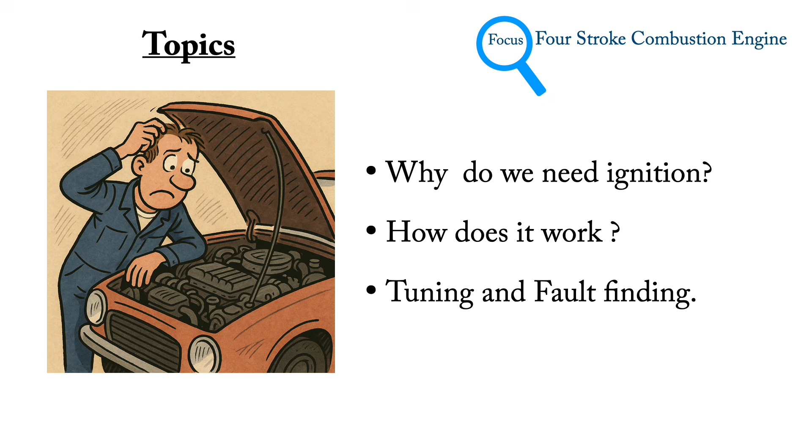Now, before we dig into the actual ignition system itself, we'll do a little refresher on a 4-stroke gasoline combustion engine. As you can see in the picture, we have all the different elements, although I'm quite sure that most of you know exactly what this is, but nevertheless, I will take you through a short introduction on how a 4-stroke engine is working.

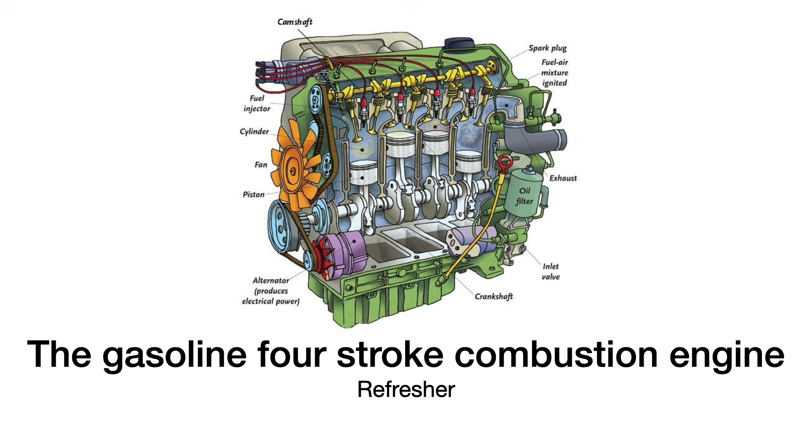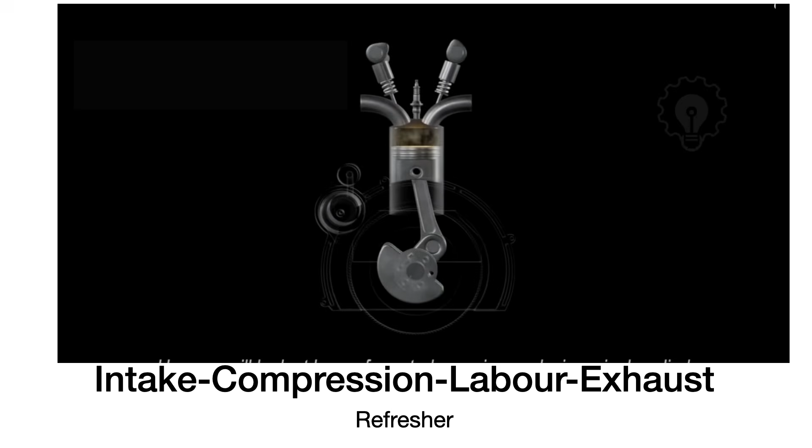We have 4 strokes: intake, compression, labour, and exhaust. And we know that the crankshaft is rotating twice 360 degrees to complete the 4 strokes.

Our first cycle is what we call the intake cycle. And during that cycle, the piston is going downwards inside the cylinder and creates a vacuum. And of course, we'll have to get an air and fuel mixture into the cylinder, and this is happening through the inlet valve, which is opening up.

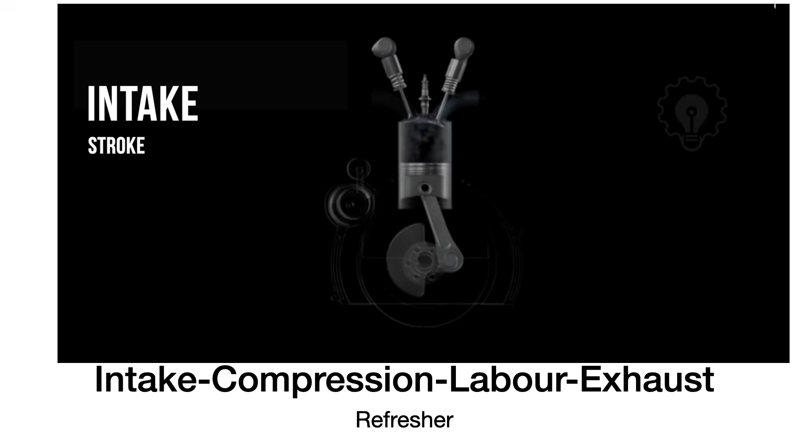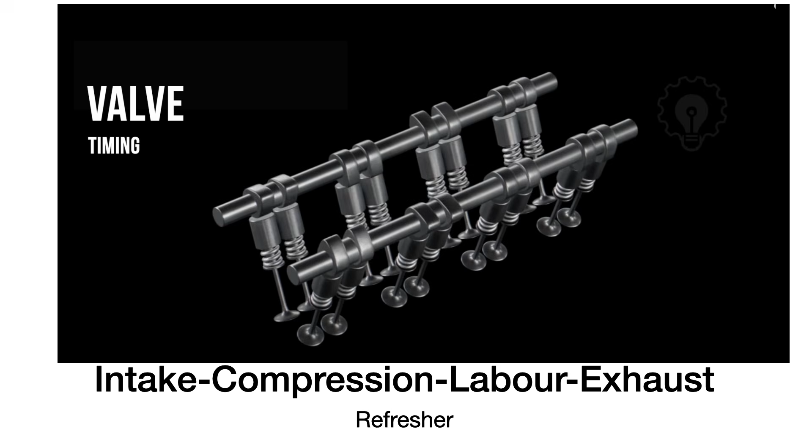The 2 points on the piston are called top dead center and bottom dead center. During that moment of the intake, the inlet valve opens up as soon as the piston goes down and closes as soon as the piston is at its bottom dead center. It is important that the exhaust valve stays closed during the complete intake cycle in order to assure a proper vacuum inside the cylinder. The opening and closing of the valves is controlled by the camshaft, and the camshaft is driven by the crankshaft. Timing is of the utmost importance, and we will discuss this later in the video.

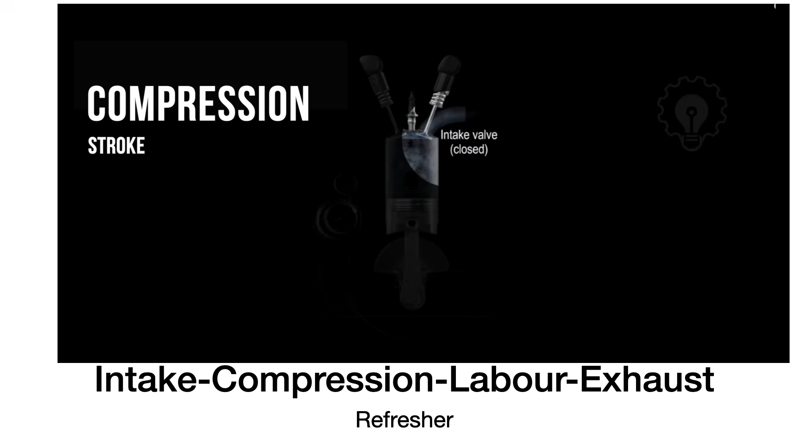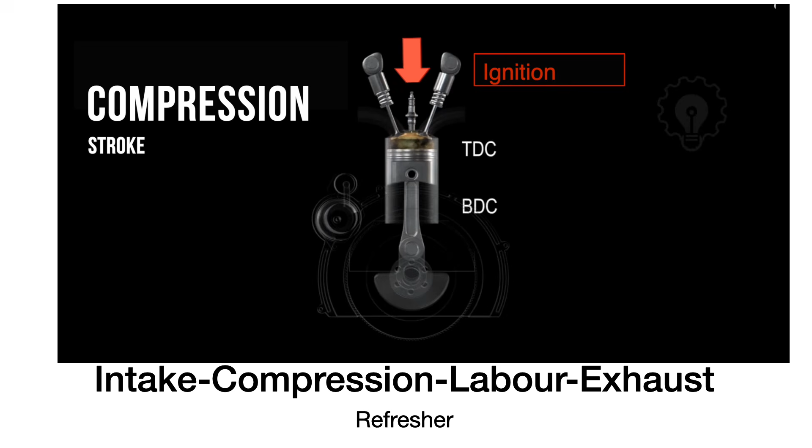When the piston has reached its bottom dead center, the intake valve is either closed or is closing. The piston then travels back upwards, and we call this the compression stroke, compressing the air and fuel mixture. Once the piston is near its top dead center, we're getting ignition. The spark plug ignites the mixture, and that marks the beginning of an explosion and starts the labor stroke.

As with any explosion, the combustion causes a tremendous force onto the piston and forces the piston downwards, hereby rotating the crankshaft. The force is expressed in horsepower and converted on the crankshaft to what we call torque. During this moment in time, both intake and exhaust valves must be closed.

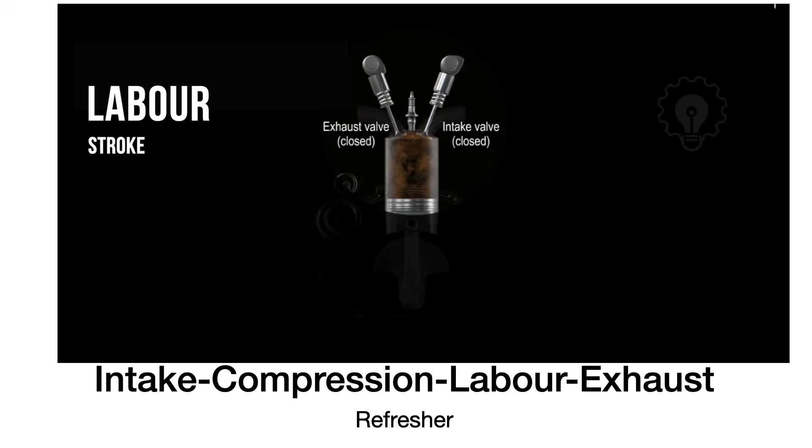Now that the labor stroke is complete, we must vacate the cylinder from the exhaust gases, and thereby the piston moves upwards, the exhaust valve opens up, and the gases are extracted through the exhaust manifold.

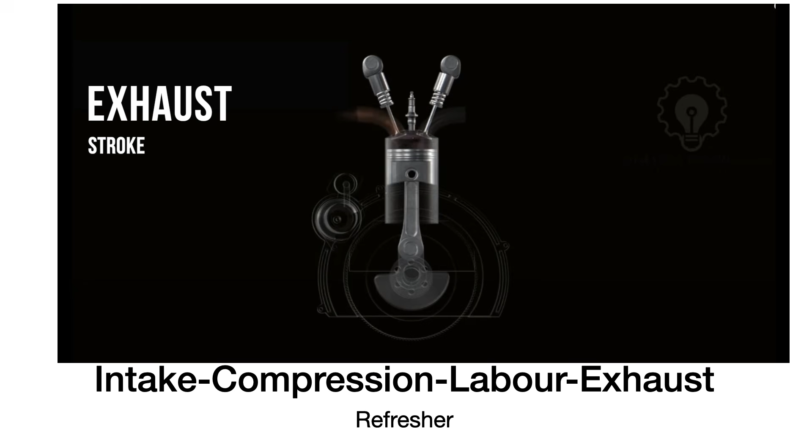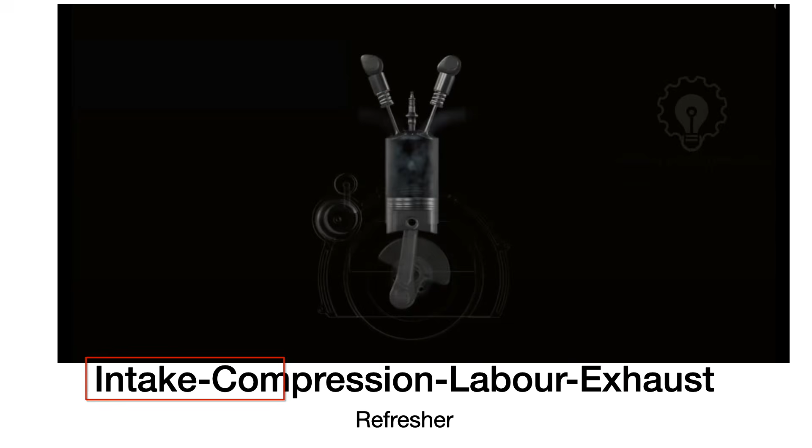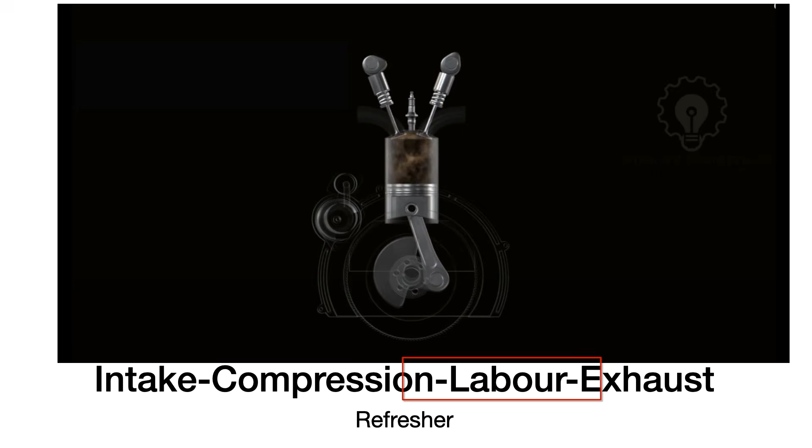And the cycle repeats. We have again an intake cycle, piston is going down, then the piston is going back up, we get our compression cycle, both valves are closed, we get ignition. Once we have ignition, the piston is forced violently down, we call this the labor stroke. And then when the piston has reached its bottom dead center, it's going to move back upwards and extracts the fumes from the cylinder through the exhaust valve, and the cycle completes.

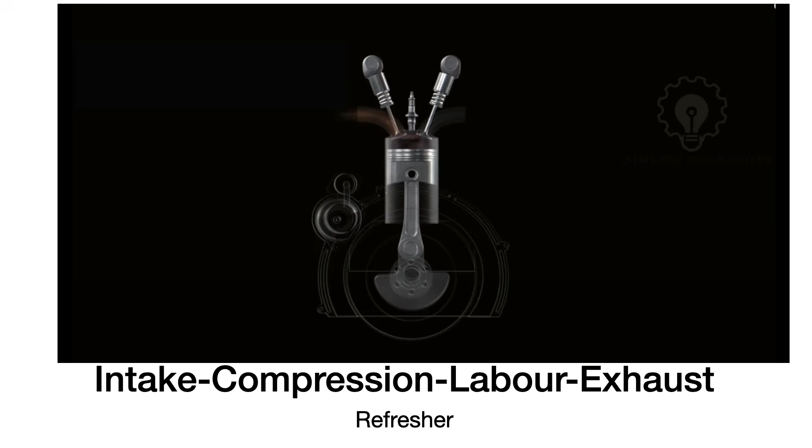Now that we know how the four-stroke engine is working, we need to determine at what moment in time we need to ignite the air-fuel mixture. We know already that it's at the end of the compression stroke, but at exactly how many degrees before top dead center does this have to happen? That is subject to many different parameters, so let's have a look at that.

The right moment of ignition depends on many different factors. For instance, the type of fuel. Not all fuels burn the same way - think about diesel fuel versus alcohol, what burns faster? Then there's RPM. The faster the engine is running, maybe the more advance we have to give it, because the piston is traveling a further distance in degrees within the same given time as it would at a lower RPM rate.

What about the compression ratio? High compression ratios, lower compression ratios - very important, because the air, gas, and molecules will be closer to each other or further away, so the flame propagation will be different.

Now what about the air-fuel mixture, the AFR? Sometimes we run lean, sometimes we run rich. Again, we need to consider this for the ignition moment.

And then we have the temperature of the engine, which also has a huge influence on the moment of ignition. I'm quite sure that some of you into racing have experienced self-combustion at one moment in time that blew up your engine, most likely because of a very high temperature inside the cylinder that was igniting the fuel mixture at the wrong time. There are some other parameters of importance as well, but we'll look at the most important ones.

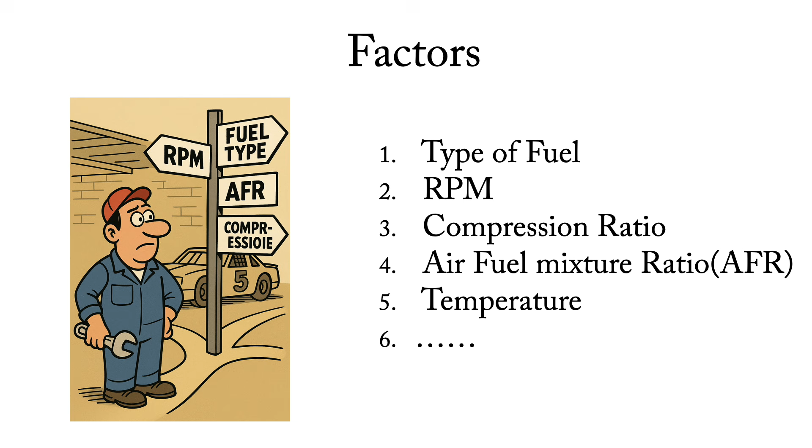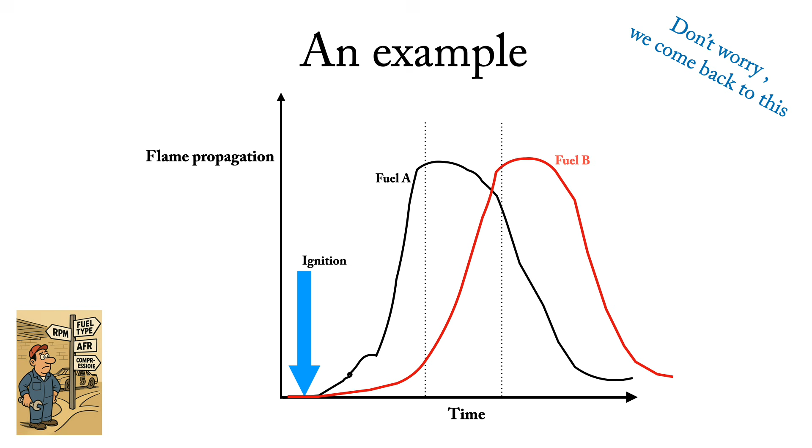Factors that can influence your ignition will be discussed further down in the video. But right now, we need to see how we are going to create the spark. And once we've created the spark at the right moment in time, we will have to distribute it. We may not have a single cylinder car - we may have a 4-cylinder, a 2-cylinder, an 8 or a 6 or a 3-cylinder. So it's important that we are able to distribute the spark to the proper spark plug and the proper cylinder.

Here we have a very simple diagram of an induction system. We have what we call a coil, and you can see on the right hand side different types of coils. They come in all forms, and the coil itself is nothing more than a transformer - it has a primary winding and a secondary winding.

When the contact is closed, we have low voltage and high current flowing from the positive of the battery through the primary winding back to the ground. That builds up a magnetic field inside the induction coil. The moment we break the low voltage high current path, there is going to be an induction on the secondary winding.

The secondary winding typically consists of a lot of windings on thinner wire, while the primary winding has a thicker wire and fewer windings. The result is that we get an induction to the secondary winding, which causes a high voltage between 10 and 20 kilovolts, but low current, and that we can use to ignite the spark on the spark plug.

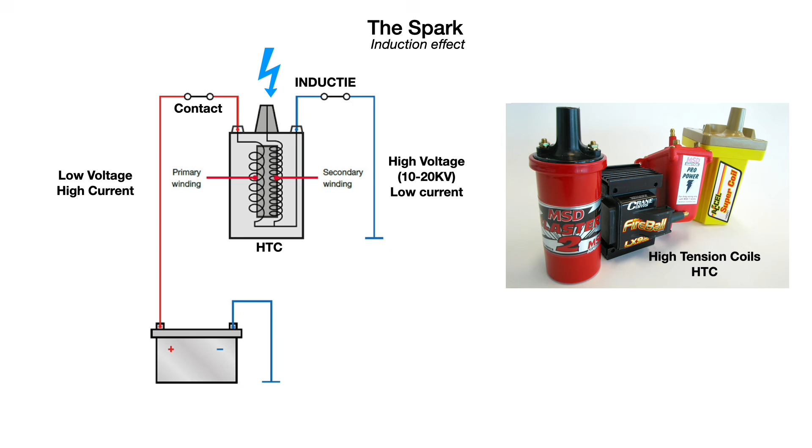Now we know that we must be able to interrupt the current through the primary winding of the high tension coil in order to create the spark, and therefore we will need some type of a switch. Now I call this the contact point. If you worked on cars before, especially older cars, we call this the breaker points, and I'm quite sure you have been adjusting the gap on those. So whenever the breaker points or the contact point opens up, the current stops through the primary winding, we get induction in the secondary winding, and we develop a high voltage on the secondary winding.

That high voltage is then passed along to the distributor, and inside the distributor cap we have a rotor which is pointing to the right lead, and then the lead connects to the spark plug, and then we have the spark on the spark plug itself.

It's important to note that the high tension coil comes in two flavors. We have what we call a low impedance high tension coil and a high impedance high tension coil. You can see the resistance values for primary and secondary windings in the little table that we have there.

What is important here is that if you are going to order a low impedance high tension coil, you must use a shunt resistor, otherwise you may burn out the primary winding. The shunt resistor will reduce the amount of current that will flow through the primary winding. On the other hand, if you're going to use a high impedance coil, then there is no need for a shunt resistor at all, so keep that in mind. Typically, the low impedance HTCs were used on older cars, but modern cars tend to have a high impedance HT.

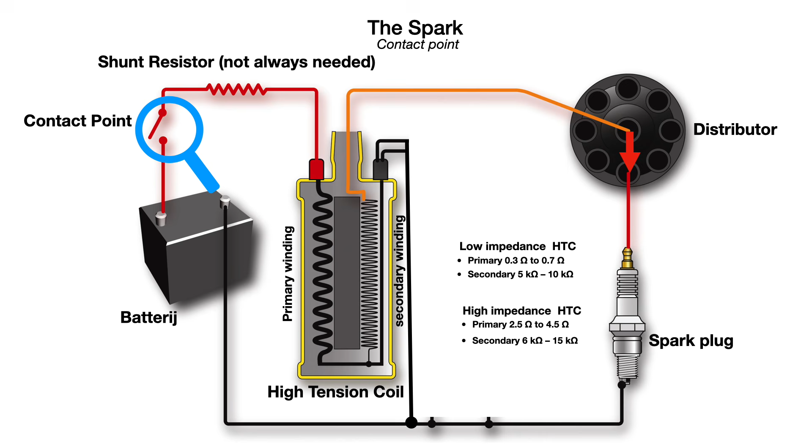We have here a few examples of contact points, but there are more types. On the bottom we have our well-known mechanical type, the breaker points. Then we have the inductive Hall version, which is no longer mechanical but is based on induction. And then on the right hand side we have something special, the twin, with two breaker points. Now there are other types like optocouplers and so on.

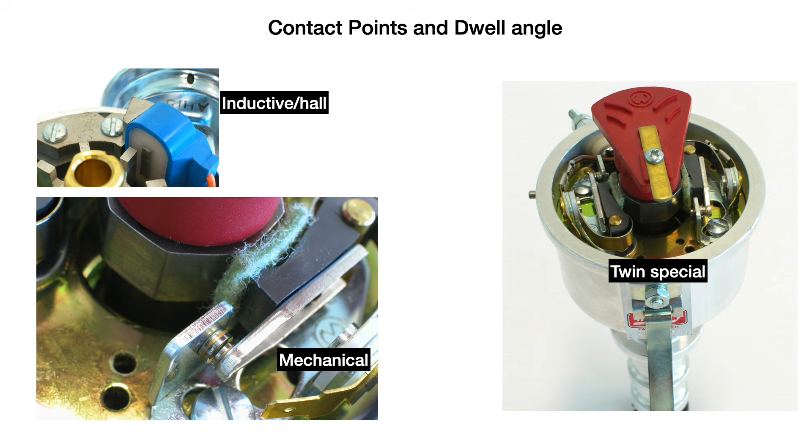On the left hand side we've got a picture of a traditional distributor, and the two points of interest for us right now are the notch and the contact breaker points. The notch is driven typically by the camshaft. If you have a 4-cylinder distributor, then you will see 4 notches on that shaft. If it's a 6-cylinder, you have 6 notches and so on.

We already know that if the contact breaker points are closed, we get current through the HTC primary winding. While the notch shaft is rotating, the contact breaker points will open up. If they open up, we get induction, we get high voltage, and we get a spark. While the notch continues to rotate, we will see that the breaker points will close, and at that moment in time we are having current flowing through the primary winding of the HTC. So it is really the notch that opens and closes the contact point.

That is why it's so important that we adjust the breaker points with the right gap, because that is going to define the dwell angle. Now the dwell angle is a fancy word, but it's nothing more than the amount of degrees under which the contact point is closed. This is very critical because we need to allow sufficient current and time to flow through the primary winding of the HTC to build up a strong magnetic field.

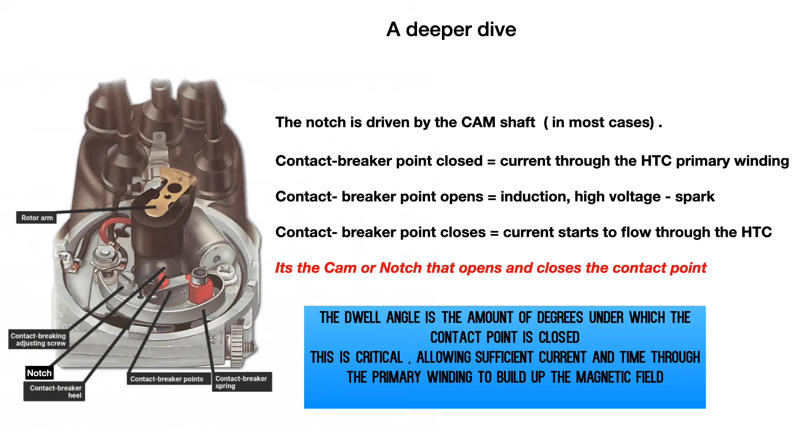So the traditional mechanical breaker points have been replaced by electronic solutions, and we'll be looking at two types: the capacitor discharge ignition system and the electronic ignition system. But regardless of which one we have, we do require a pickup point, a replacement for our well-known breaker points.

Typically, the pickup point is either a Hall effect or a magnetic pickup, but it could also be an optocoupler. That device will then generate a pulse each time it is triggered, and then the pulse is fed to either the CDI or the electronic ignition system. If you are using an electronic ignition system, then that pulse will be amplified by solid-state devices inside the ignition system to drive a high current through the primary winding of the HTC.

A CDI is working slightly different. It's going to load up a large capacitor inside the CDI, and this capacitor will discharge across the HTC as soon as it receives the pickup pulse from the pickup device. Now be very careful, as the CDI is using a high current and hundreds of volts on its primary winding to the HTC.

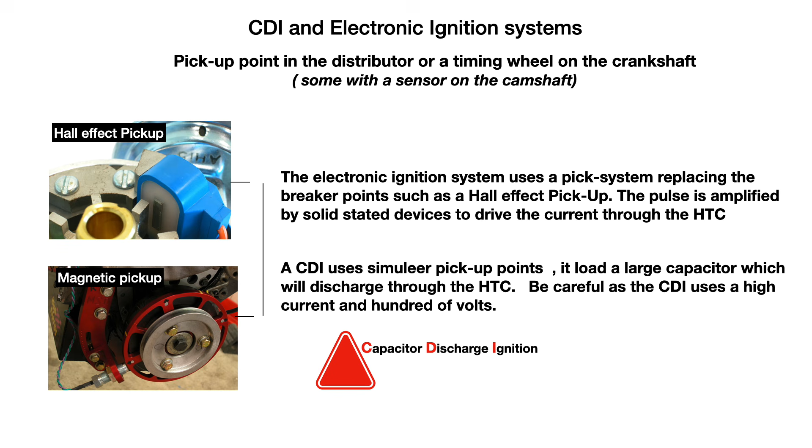So we've been able to generate a high tension, and that could result in a spark, but somehow we need to get this high tension to the proper spark plug. Our engine might be a 4-cylinder, a 6-cylinder, an 8-cylinder, and it might have a certain firing order, maybe cylinder 1 first, then cylinder number 3, then cylinder number 2, and then 4. Firing orders could be different depending on the engine.

So somehow we need to have what we call a distribution system, and that is why we have what we call a distributor. The distributor is typically driven by the camshaft, and it has inside pickup points, be it mechanical or electronic. On top of it, you will find the distributor cap, and on the distributor cap you always have a central point. On that central point we connect the lead coming from the high tension coil, which will then distribute the high voltage to one of the other connectors on the distributor cap. Each connector there, all around in a circle, will actually lead up to a specific cylinder.

Inside the distributor cap you will find a rotor, and on the central point on the rotor we will actually have the high voltage coming in, typically through a carbon little spring-pushed part. That often goes wrong, so we might talk about this later when we start talking about troubleshooting. Then the rotor will distribute over the brass pathway to the proper lead, or the proper connection point on the distributor cap.

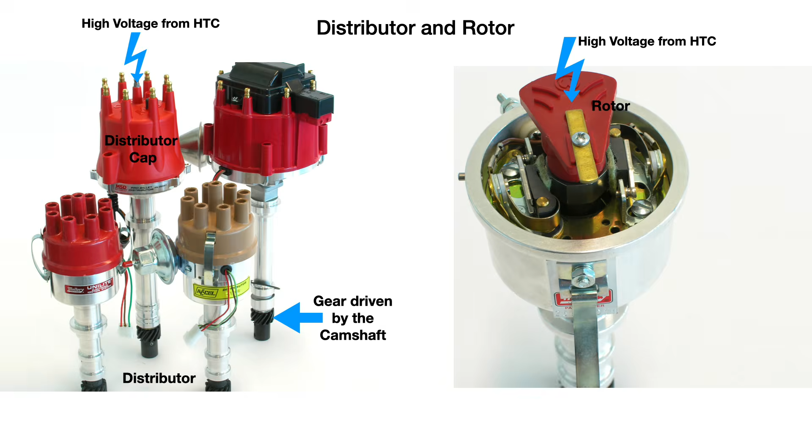Cold types have typically a large insulator jacket surrounding the electrode, so they convey the heat to the engine block much better. That means the spark plug itself is not going to get real hot. That is good, but the problem is that we're going to have an issue on idle, because it's going to spoil the electrode - we will have carbon buildup and so on, and we won't be able to burn it off because the spark plug isn't getting hot enough.

On the other hand, the cold type is good especially if you go to high RPMs and develop a lot of heat in the car. Then they are really good, because if you were to use a warm type, you probably may melt down the electrode. The warm types are just the opposite - they have a smaller insulation jacket, so the electrodes get a lot hotter inside the engine when it's running.

So the warm types convey less heat to the engine block, which is really good for running idle, because then they will burn off all the deposits on the electrode. But on the other hand, if we're going to go to high demands and high RPMs, then they won't be able to sustain that, because they will actually get so hot that they are going to melt down the electrode. So we really need to make sure that we select the right spark plugs with the correct heat range, because that is all very critical.

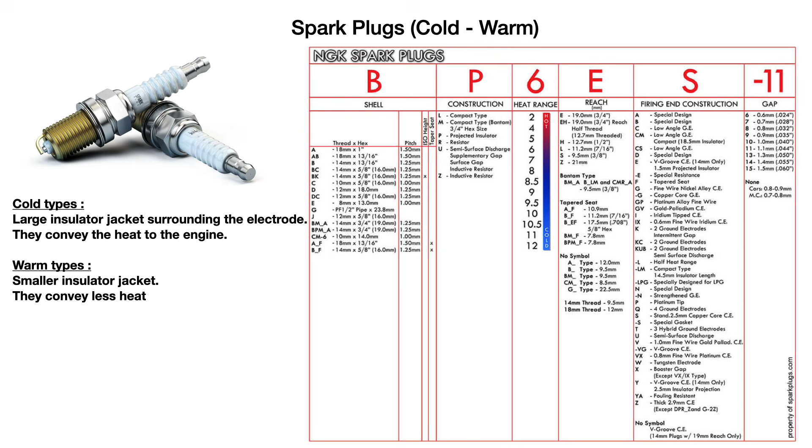Which one should we now select? So now the question is, what should we use for our car? Cold or warm spark plugs? Well, the answer depends on many different factors: the engine power, the compression, the fuel type, and how you're going to use the car - be it a street car, a race car, or a fast road car. It all depends.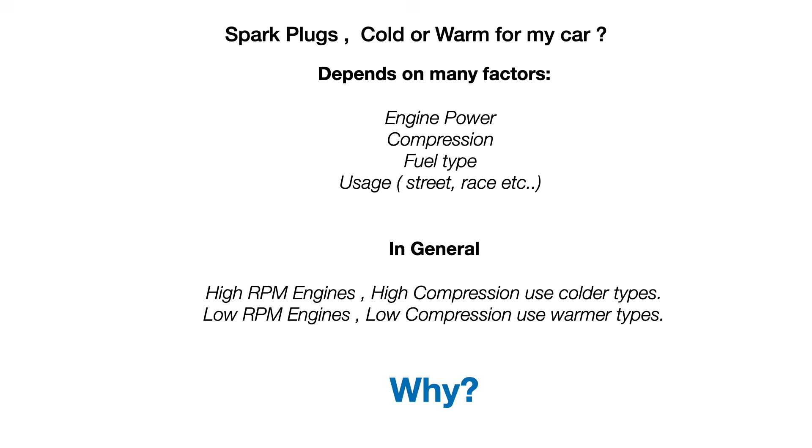But in general, we can say that engines running at high RPM with high compression are better off with colder spark plugs, and engines running at lower RPMs and low compression are better off with warmer types. And now the question is, why?

So maybe you can now formulate the answer. I assume you already got it right, but let's recap anyway. On performance engines - those with high RPM and high compression - they are much better off using a colder spark plug. That's simple, because those engines create high temperatures inside the combustion chambers.

And that can cause a too-hot spark plug to glow and trigger pre-ignition on the fuel-air mixture, which is devastating for an engine. If you're running at high RPMs and this happens, you get an unwanted ignition, and that could be at the right time or the wrong time. If it's at the wrong time, it's going to blow up your engine. We often call this pinging, and that's the same as murder of the engine, or damage to the engine.

A too cold spark plug, however, will foul at low RPM because the deposits on the electrode will not burn off. Now, standard engines are engines with normal RPM and relatively low compression. They are better off using a hotter spark plug since the temperatures are lower inside the combustion chamber. If you were to use a cold spark plug, it will actually foul. The hot spark plug will burn off that fouled electrode, but not if you're using a cold spark plug.

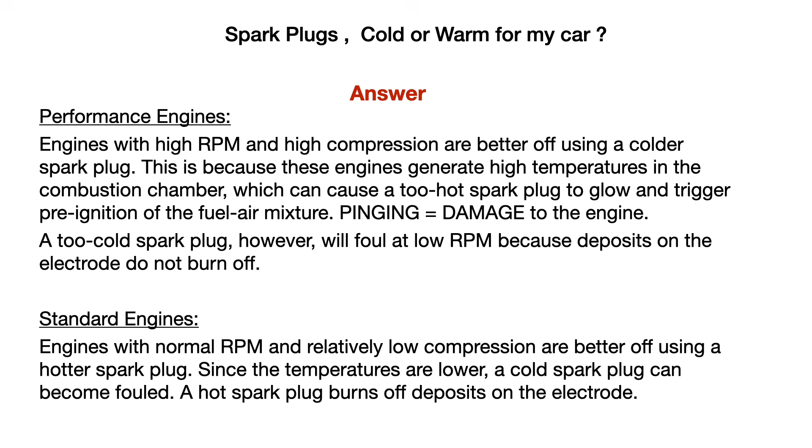So folks, so far so good, and I hope you are still following and didn't fall asleep yet. I know it can be pretty boring sometimes, but now we need to talk about the ignition moment - what is the right time to deliver that spark to the spark plug?

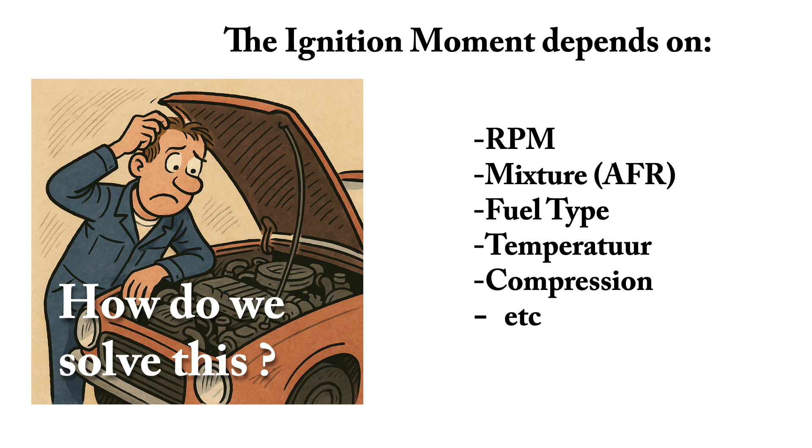And that depends on many different factors: the RPM, the mixture, the fuel type, the temperature, the compression, and a couple of other factors. And we need to fix all this. So how are we going to solve this so that our ignition system is adapting to all these different parameters?

So somehow we need to make sure the engine is running properly on idle, low RPMs, and high RPMs. We will do this by adjusting the moment of ignition, and we often call this the advance. Now let's assume the engine is running on idle and we have set our ignition advance to, let's say, 4 or 5 degrees.

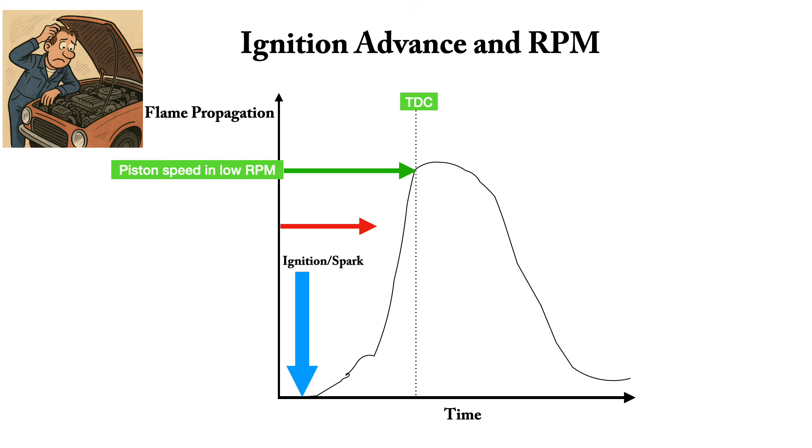So the piston is moving at a slow speed inside the cylinder, and we have the ignition moment just at top dead center - in fact 4 degrees before top dead center - which matches up with the peak of the burning curve, or the flame propagation.

Now let's assume we are going up in higher RPM, so the piston is now moving a lot faster inside the cylinder, so it's going to reach top dead center a lot earlier. And as a result, the peak, which still has its own burning time, will come much later after top dead center.

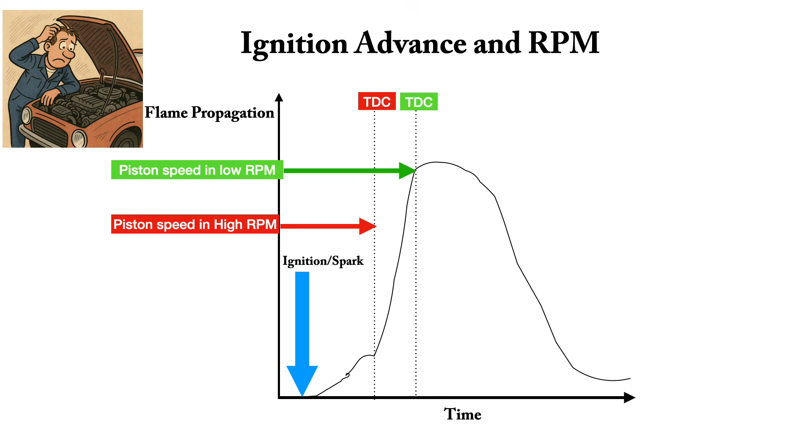So now we have lost a lot of power. It's important for us that we can adjust the ignition advance so that it works under all RPM conditions. The solution is rather simple.

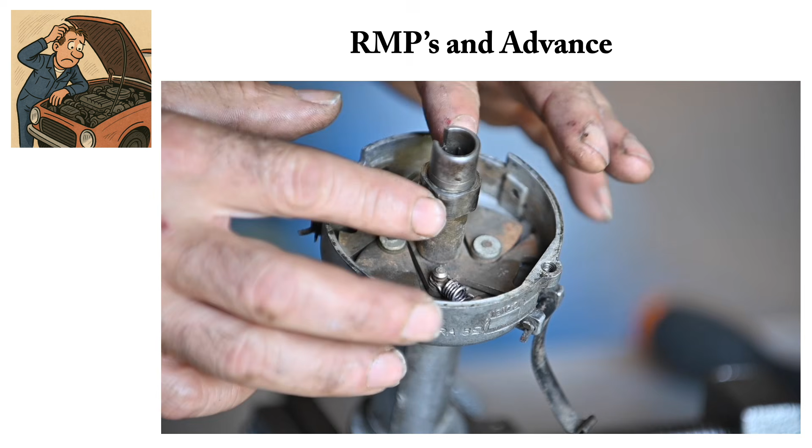Inside the distributor we have what we call bob weights, and those bob weights will fly out under centrifugal force while the shaft is spinning. There are also some springs that will retract them back or limit the advance. If the bob weights move out, we are having more advance.

Bob weights are mounted on the shaft of the distributor, and while the distributor shaft is rotating, the bob weights will be thrown outwards by centrifugal force. They are constrained by the springs, and as such they will move forward the advance. In other words, they rotate the platform where the pickup point is, and we get more advance.

If the RPMs are coming down, then the bob weights are retracting again and the platform rotates in the other direction and we have less advance.

If you are into tuning your car and you want to influence the ignition curve, then you can work on the springs. You can install softer springs so you will have far more advance, or harder springs so you have less advance. And of course you could also play with the weight of the bob weights.

Now on modern cars you can do this with a program, and quite often the distributor will allow you to program it through a USB or Bluetooth interface where you can set your own ignition curve. Let's look at one of those curves, a typical curve you would find on a 1-2-3 ignition system where you can program the curve. That's not based on bob weights and springs, it's fully electronic. So there are different flavors of adjustment.

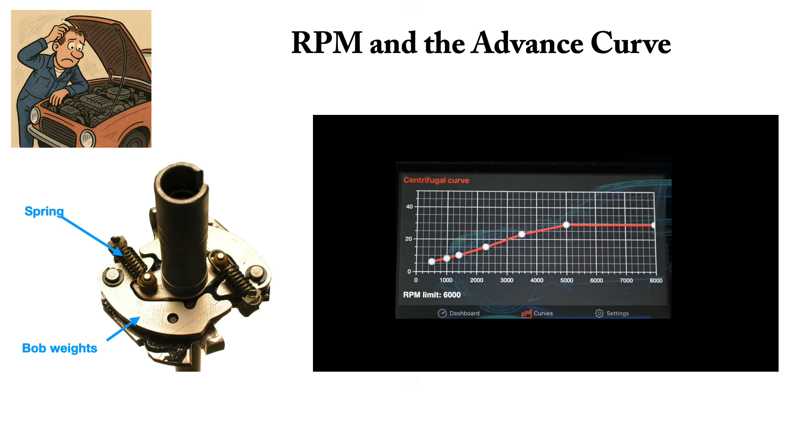Now let's take it a step further. We need to look at our AFR, air-fuel ratio, and the advance, because lean mixtures are burning slower and rich normal mixtures are burning faster.

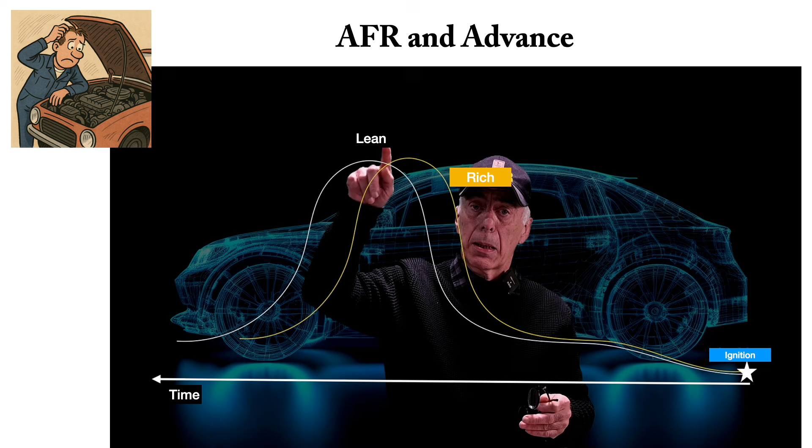I know this is a fairly busy slide, but we'll take it piece by piece. Assuming now that we are going downhill or cruising along, then our throttle on our carburetor will be either fully closed or partially closed. At that moment in time, we are having a very lean mixture inside the cylinders, and we know that the lean mixture is burning slower.

So the peak is coming later, but we still want to develop enough power to keep the car moving, especially under cruising conditions. So we need to advance the ignition moment even more, further than what the bob weights are doing, and therefore we are using what we call the vacuum advance.

The vacuum advance is the vacuum out of the intake manifold, which is fed to the side of the distributor, and there we have a little membrane that will pull the bob weights even further, or that platform even further, so we get more advance.

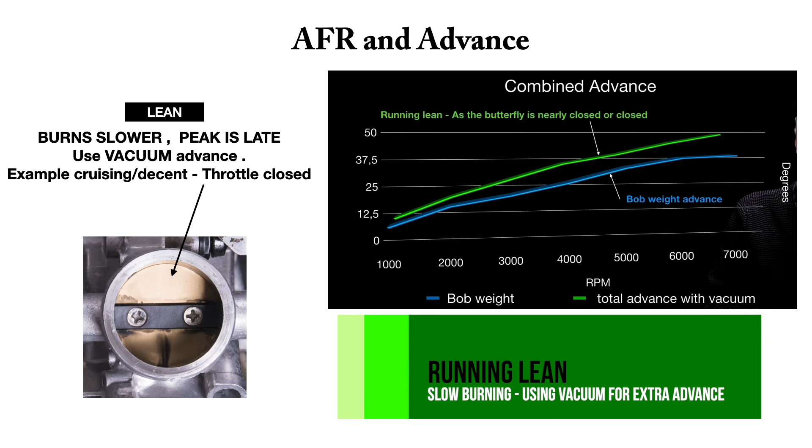Of course, if the throttle is open, that advance isn't working anymore because the vacuum falls away and we fully rely on the bob weights.

So under normal driving conditions with a normal rich mixture, for instance under acceleration, or we are going wide open on the throttle, or giving enough throttle, then the throttle is open or partially open to a large extent, and at that moment in time, the vacuum disappears completely and we fully rely on the bob weight advance.

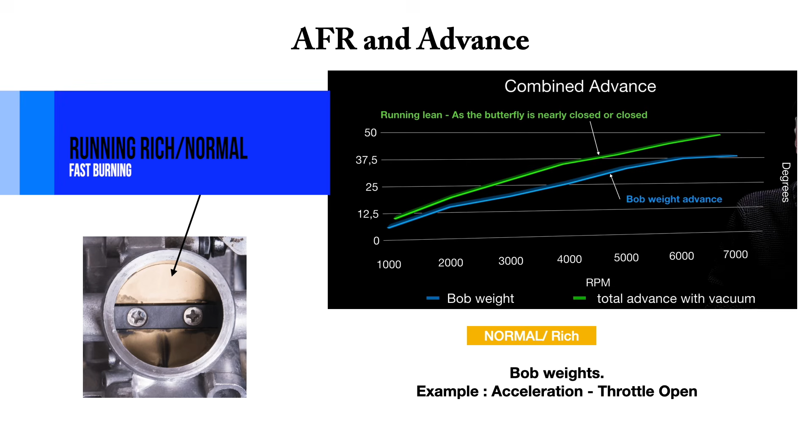That is why in racing, we never have a vacuum hose or a vacuum advance, because we are most of the time wide open. We are always running normal and rich. We never end up in the lean condition.

Anyhow, if you look at the diagram or the curve on the screen, it's the combined advance. As I explained, the blue curve is how the advance system is working only with the bob weights. Whenever the throttle on the carburetor is open, we fully rely on the centrifugal force of the bob weights creating the advance.

However, if we end up in a lean condition, for instance we let the throttle go and the butterfly closes in the carburetor, then we want to continue to have some power, like under cruising, and we need to make sure we get more advance because that leaner mixture is now burning slower. That's the moment the vacuum advance will kick in, because we have created a lot of vacuum inside the intake manifold, which will rotate the advance inside the distributor, and that is the green line, which is the combination of the bob weights and the vacuum advance.

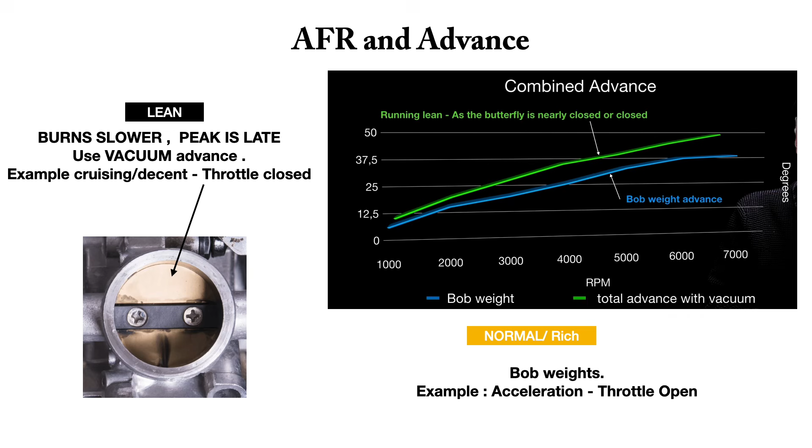Remember, even though we have vacuum advance, the engine is still running at a certain RPM, so the bob weights are still doing their thing.

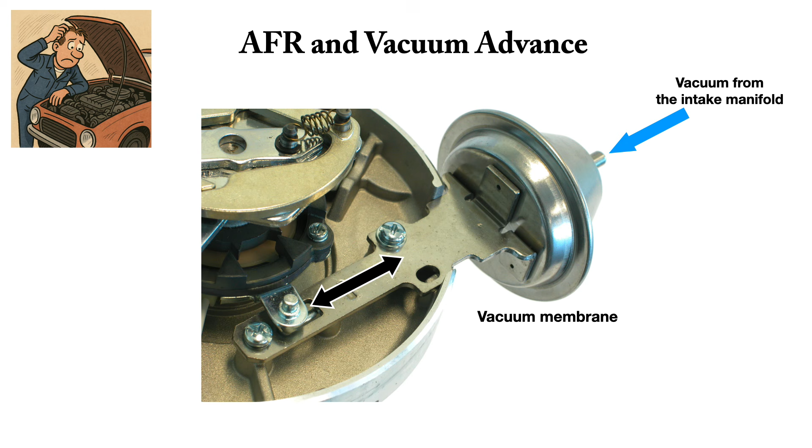This is a very easy slide compared to the previous one, and we are looking down onto the vacuum advance mechanism. You will see the distributor, and on the distributor we have a vacuum advance membrane, and the blue arrow is connecting the vacuum membrane towards the intake manifold with a small tube, and that's where we apply the vacuum. When the vacuum is applied, you can see with the black arrow that we are moving forward or backward the complete platform inside the distributor to create that additional vacuum advance.

In this little video I have hooked up a vacuum meter, and I can see the vacuum being created in the intake manifold depending on the throttle position.

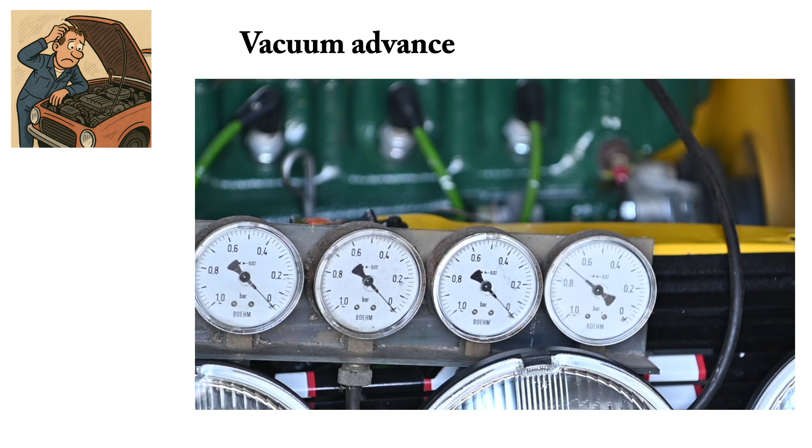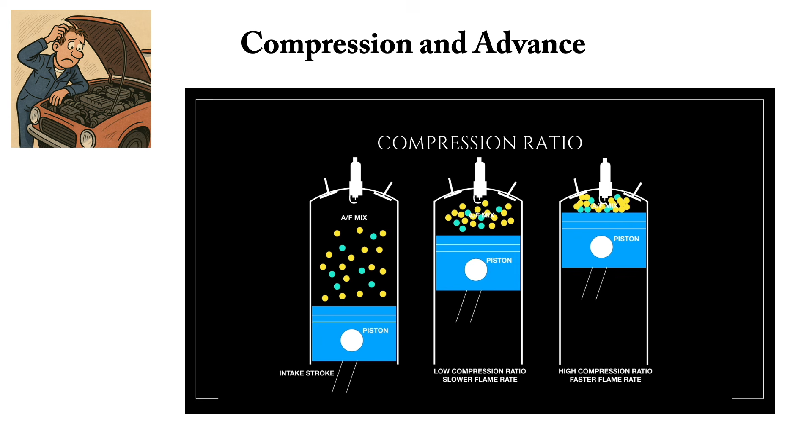So now we need to talk about something very important, the effect of the compression on the burning speed. If we're looking at a low compression engine, or an engine with a very low compression ratio, then the burning chamber is fairly large. That means that during the compression stroke, the air and gasoline molecules are far away from each other, and it makes it very hard for the flame to propagate through that kind of mixture. So it's going to burn a lot slower.

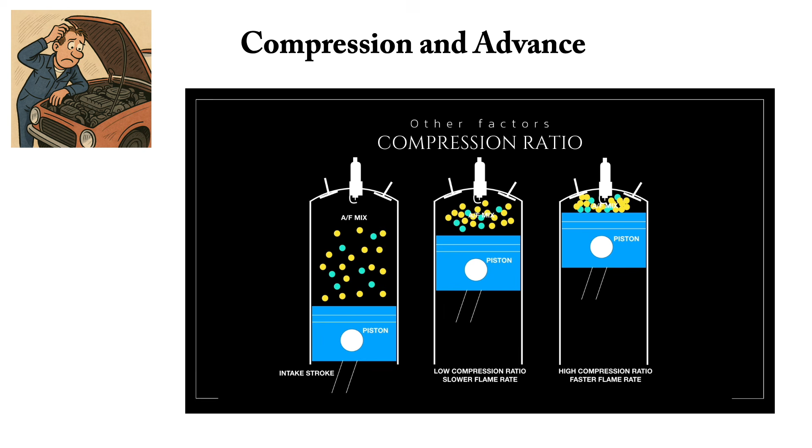Now, on the other hand, if we have a high compression ratio and a very small combustion chamber, then these air and gas molecules are so close to each other that they will enhance the flame propagation when it starts burning, so we're going to get a lot more power out of that one. That all has an immediate effect on how much advance we have to give to the engine, and that's different for a low compression versus a high compression engine.

So let us talk now a little bit about fuel octane. Octane is a number given to a specific gasoline that indicates how stable the fuel is in terms of self-ignition or self-combustion. The higher the octane number, the more stable the fuel is, so you're not going to run the risk of self-ignition, which you may have with lower octane fuels.

This can be very dangerous. You can get into a pinging condition or a knocking condition, which is very dangerous, and it will either destroy your engine or cause serious damage to it.

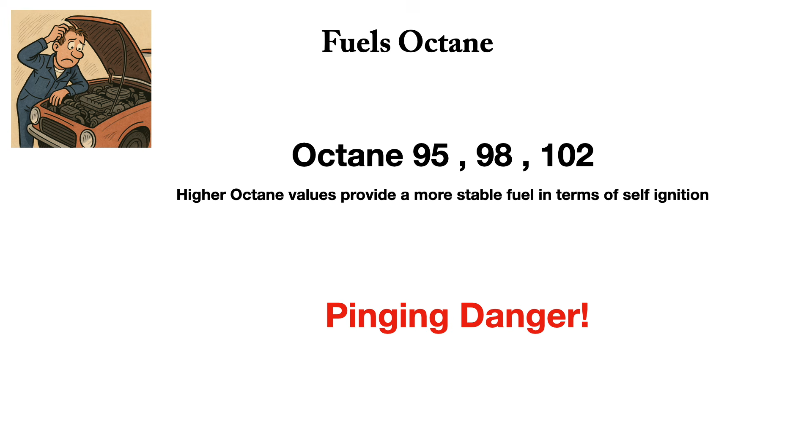So it's important that you have the right octane for your fuel, and the octane also relates to your ignition system. It's a common misunderstanding that a high octane fuel like 102 is going to provide more power. It does not. That depends on the blend of the fuel, what is inside it. Gasoline is often mixed with other products, and that will affect the power it produces, but it's not the octane value.

Temperature is a very critical element. I'm using a blowtorch here, and as you can see I'm feeding gas in initially, so it's a very rich mixture, and then I'm slowly adding oxygen to it, and you can see how the flame changes from yellow to blue. That means the flame is getting hotter, and the mixture is getting leaner.

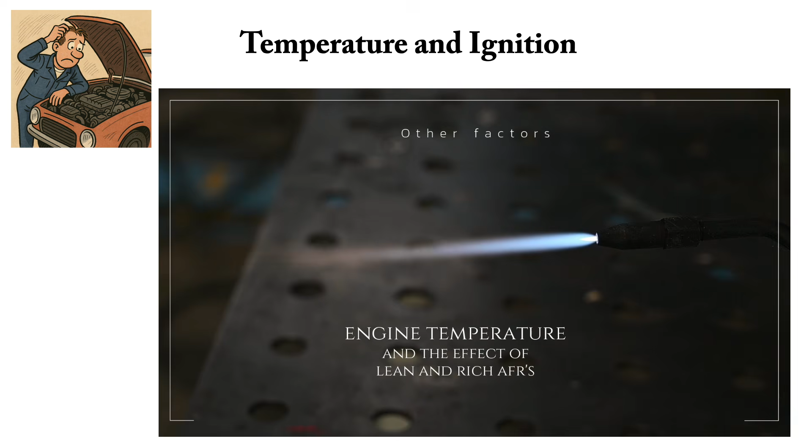So the point here is that lean mixtures increase the engine temperature inside the combustion chamber, and that has an immediate effect on the flame rate, the burning rate of that fuel. That fuel will burn faster, so we need to compensate with the ignition for that.

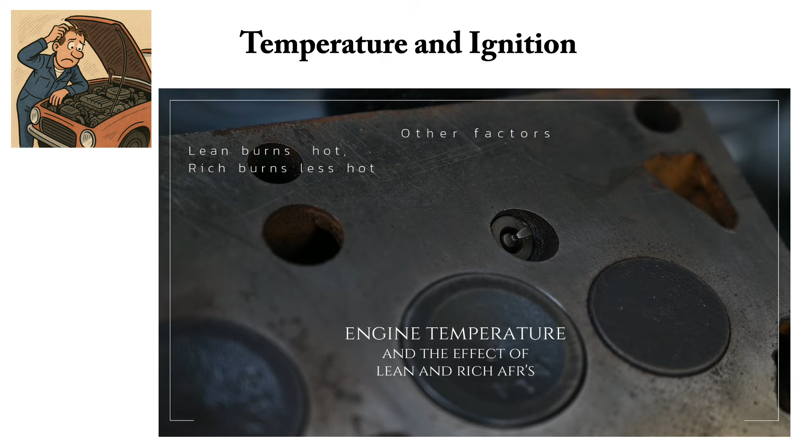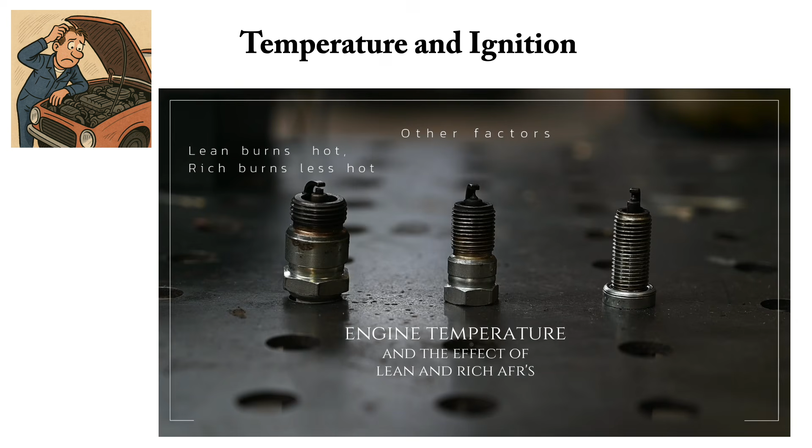Furthermore, depending on how your car is running, your ignition system will have to have the proper spark plugs. We have spark plugs of all kinds and degrees of heat, so we have hot spark plugs and colder spark plugs, and you will have to fit the proper spark plug according to how hot your engine is running.

What you're about to see is how I adjust my ignition system. I like to keep things simple and straightforward, and adjusting the ignition consists of two steps: the static adjustment and the dynamic adjustment.

To be very honest, the best tools are your ears and eyes. If you ever met a very old mechanic, you'll see he's not going to use any fancy tools. He's just going to listen and look at the engine, and that's how he adjusts the ignition and the ignition advance.

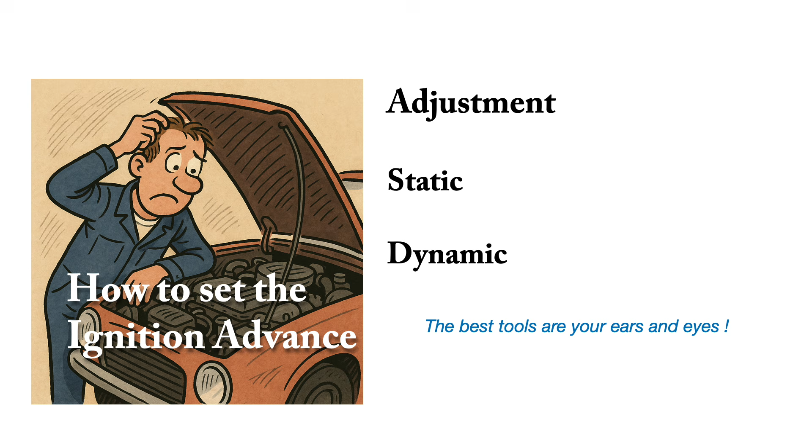Before we start adjusting the ignition, there are pre-checks we must do, otherwise it doesn't make sense to adjust the ignition at all. The first thing is to make sure you have the correct spark plugs and that the electrode gap is set properly—quite often that's something like 0.7 millimeters.

The next step is to make sure the high tension coil cables, the cables between the distributor and the spark plugs, have no damage and are properly installed. Third, make sure the engine has a good ground—I've seen problems with grounding the engine, and as such the spark on the spark plug doesn't work too well.

Fourth, the distributor. Check for cracks, signs of short circuiting, and make sure the central point spring is not having too much wear. Remember the carbon tip inside the distributor that points towards the rotor? That often is in bad condition, so always check that one.

Then we have the rotor. Make sure it's clean, no cracks, and that it has the correct distance to the contact points of each individual cylinder in the distributor. Make sure you have the right compression on all cylinders with little variance between them.

Make sure the valve clearance is set correctly, that the fuel and carburetor are set up properly and adjusted, and that you're running good new fuel, not old fuel that's been sitting there for 2 years. Make sure you have fresh fuel.

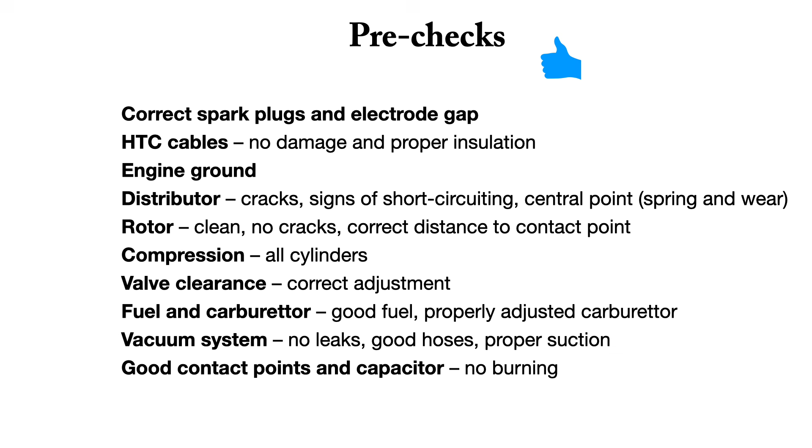So here's the sequence on how I adjust my ignition system. You do this with a warm engine, of course, and we have done the pre-checks. The first thing I do is adjust the breaker points gap—of course, if you have breaker points. If you don't have any, then you can't do this.

Then we proceed to the static adjustment. I'm setting the timing on the distributor, but the engine is not running. We'll look at that in a few minutes.

Once that is completed, I will crank up the engine. I will let the engine run at idle, and I call this dynamic adjustment at idle. I will correct the distributor in terms of advance to make sure the engine runs smooth.

And then finally, I'm going to spin up the engine at different RPMs, and I call that the full dynamic adjustment. I might readjust my distributor in terms of advance until everything is working smoothly. So now let's look at those individual steps.

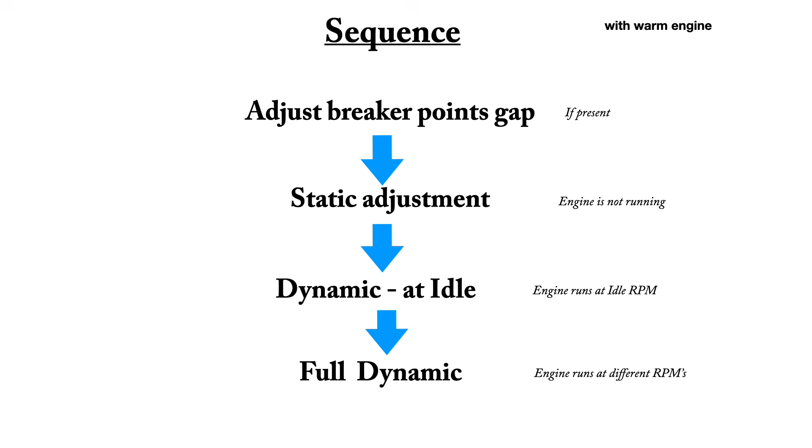Assuming we have breaker points, the first thing we're going to do is set the gap—that's not very difficult. We'll take off the distributor cap and rotate the engine until the top of the notch on the shaft inside the distributor is pushing on the breaker points and pushes them wide open. So look for that top point on that notch.

Once that's done, get your gauge, typically specified for your specific engine. Remember, the gap here is going to influence the dwell angle. Typically that gauge is between 0.6 to 0.7 millimeters—that's kind of a standard, but it could be different for your engine.

Then we're going to loosen up the holding screw, not too much, but just enough. With a little screwdriver on the side, you can move the points back and forth a bit to adjust the gap. Put your gauge in the gap and adjust the breaker points so the gauge can be removed and inserted easily—not pushing the points open or squeezing. Then lock back down the lockdown screw and recheck the gap. This is how simple setting the gap is.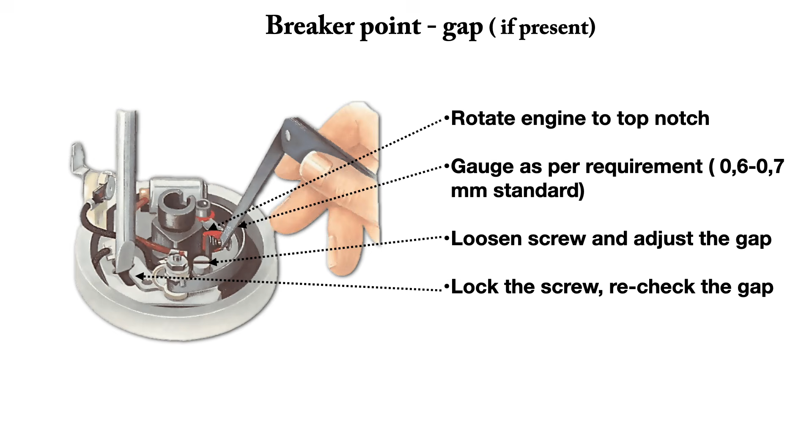But please respect the gap distance, because that is going to have a huge influence on your dwell angle. The static adjustment is pretty simple and straightforward.

We'll remove all the spark plugs so it makes it easier to spin the motor around, because you will have to do this manually. On cylinder number 1, we're making sure that the cylinder is at its end of the compression stroke.

So the valves are all closed. If you're not sure about this, then open up the valve cover and check the valve state of cylinder number 1. In that condition, you will see that the crankshaft marking will more or less line up with the markings on the pulley.

Try to set the crankshaft mark at 5 degrees before top dead center, as shown in the picture. Now attach the spark plug to the high tension coil or cable of cylinder number 1, making sure that you hold the plug against the engine ground.

Turn on the contact, but do not start the engine yet. Now you loosen up the distributor bolt or nut which is holding the distributor in place, and slowly rotate the distributor in the normal direction of rotation. You will have to find out for your car what the normal rotation is, counterclockwise or clockwise.

Once you've done that, slowly turn back the distributor in the opposite direction until you see the spark. And then we're going to tighten the distributor bolt, and you're done. Your static adjustment is now set.

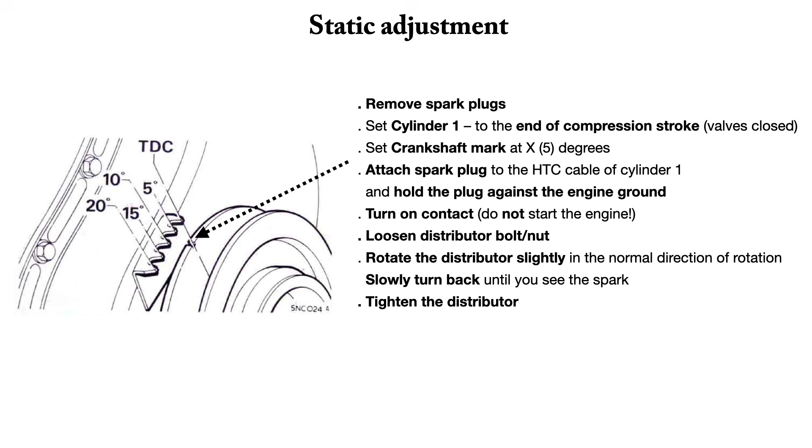If you're running breaker points like in the old days, then it's important that the first thing you do under the dynamic checking is the dwell angle. So we're going to measure the dwell angle, and therefore you will need a strobe light.

Now the strobe light typically has a plus and a minus connection, which should go to the battery. And then most of the time you will find also a green lead, which needs to go to the negative side of your high tension coil if you're running on a negative ground system. If you're running on a positive ground system, it's going to be just the opposite.

With your strobe set to dwell angle, then you start the engine and you will have to measure the dwell angle on the strobe itself. It will be displayed on the display of the strobe. So making sure that the engine is running at idle, and then verify the readout on the strobe.

If that readout in degrees is not correct for your specific engine, then most likely your breaker point gap is set wrong and you should redo it.

There is no need to attach the pickup clamp of the strobe to one of the high tension leads going to one of the cylinders, because we are not using the flash mode at this moment. It is only the dwell angle. The exact method for your strobe light depends a bit on the strobe light that you have.

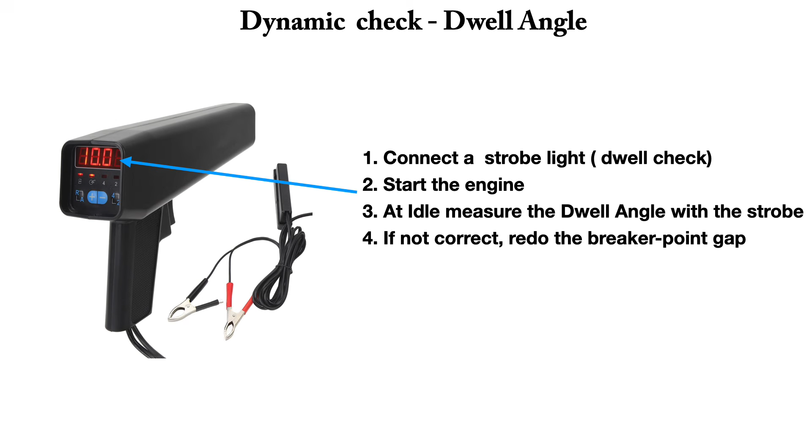So here is my dynamic adjustment. Obviously we want to do this with the engine warm, and I'm not going to use a tool for that. So we'll start up the engine.

I will loosen up slightly the bolt that is holding the distributor in place, and I'll let the engine run on idle. I will listen to and observe the engine. Does it run smoothly? Does it shake a lot?

I will also keep an eye on the RPMs. Either I have an RPM meter inside the car and somebody is watching it and reading it out, or I have attached an RPM meter to the car. I now slowly will rotate the distributor in the opposite direction of its normal rotation, meaning I'm giving it more advance. If the RPM increases, I will continue turning it until it stops increasing.

I will then adjust the idle screw on the carburetor so that the engine runs back at its normal speed, because otherwise you're going to get the effect of the bob weights.

If the RPM did not increase in the previous red steps, I'm going to try turning the distributor in the normal direction. Maybe we had way too much advance already, so I'll turn that back a bit, and then we repeat the red steps. Once the RPM is correct, we'll do it again.

I'm going to do the red steps all over again, starting with listening to the engine. We keep an eye on the RPM, and I'll repeat the slow rotation of the distributor in the opposite direction of normal rotation. If the RPM increases, I'll continue until it stops again and readjust the idle screw. You might go through this a couple of times. Once the RPM is correct, I'll tighten down the distributor.

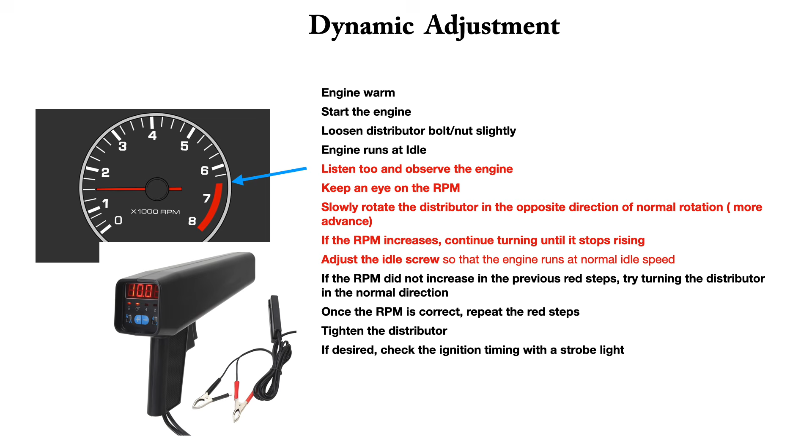If desired, you can check the ignition timing with a strobe light if you want to know exactly how much advance you've given the engine. But this is the old school method that always works.

Now let's start with the full dynamic adjustment of the advance, focusing on the bob weights. We're going to disconnect the vacuum hose. There's a lot of debate amongst people whether you should do the adjustment with the vacuum hose or without. The reality is I want to check the advance pattern of the bob weights, and I don't want to do this with the vacuum advance. That's going to be my next test.

So I'm going to let the engine warm up. I've disconnected the vacuum hose, and I'm going to connect my strobe light. I'll put the clamp on the first cylinder, on the spark lead. I'll start up the engine, and measure the amount of degrees of advance on the strobe light. Now there's two ways of doing this.

If your strobe light can use an offset, that's great. You just make sure the mark on the pulley and the mark on the engine block line up for TDC, and adjust the dial button on your strobe light until they line up, then you can read out how many degrees advance you have. If you don't have such a fancy strobe light, you can just look at the indication on the pulley, where that mark is against the engine block, and how many degrees.

We're going to record the measured degrees, then increase the engine speed in steps of 500 RPM. Each time we'll measure and record the amount of degrees. Listen very carefully to the engine, because if it starts to ping or knock, you have too much advance timing, and you should reduce the static timing slightly or adjust the springs and bob weights to make sure you don't get this knocking or pinging.

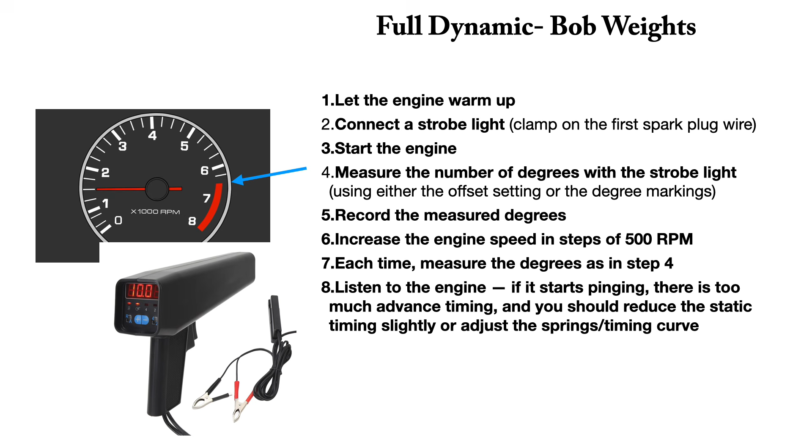We've arrived almost at the final test, which is the full dynamic test with vacuum advance. So we make sure the vacuum pipe is hooked up. We let the engine warm up, connect the strobe light just like before, attach the clamp to the spark plug of cylinder number 1, start up the engine, and measure the amount of degrees advance we have with the strobe light when running on idle.

We should see more degrees because now the vacuum advance is doing its thing, since the butterfly on the carburetor is closed. We'll record the measured degrees. Now, instead of increasing the RPMs, I'm going to disconnect the vacuum hose from the distributor and plug the hose with a small bolt. When I disconnect it, the ignition advance should decrease on my strobe light.

The good thing is, if you have a vacuum pump, you can connect it to the distributor membrane and start pulling vacuum according to the vacuum advance curve for your specific distributor. You should see the advance increase without the RPMs of the engine increasing through the bob weights, so the bob weights aren't doing their thing here, it's just pure vacuum advance.